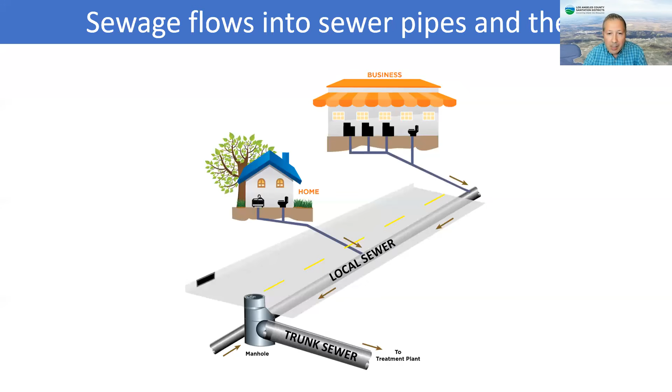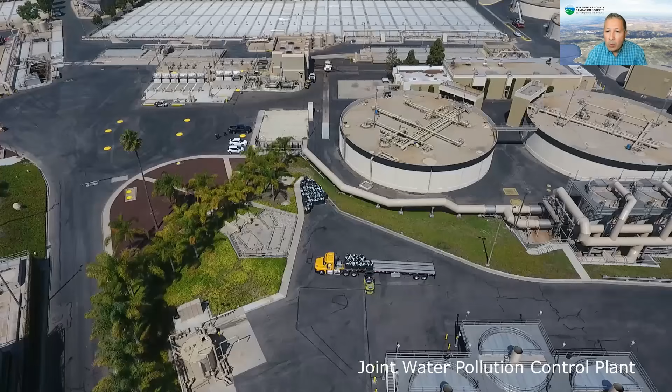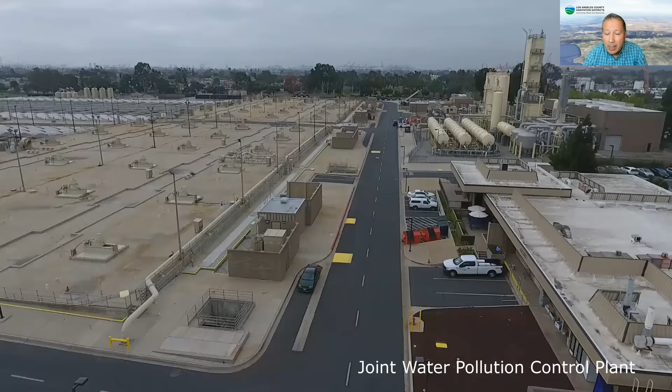Our largest wastewater treatment plant is located in Carson. It is called the Joint Water Pollution Control Plant. It is the largest wastewater treatment plant in our system. It is also the hub of the main sewer system that serves the southern half of the county. So 73 cities, 5 million people depend on this plant to operate 24/7 without failure.

And essentially, sewage flows into the plant, and in less than half a day, we turn that into clean water, and that clean water goes out to the ocean through 2 tunnels shown here in the orange lines that were built 60 and 80 years ago. And these tunnels were not built to current seismic standards. So in addition to their age, their seismic issue is also something of concern.

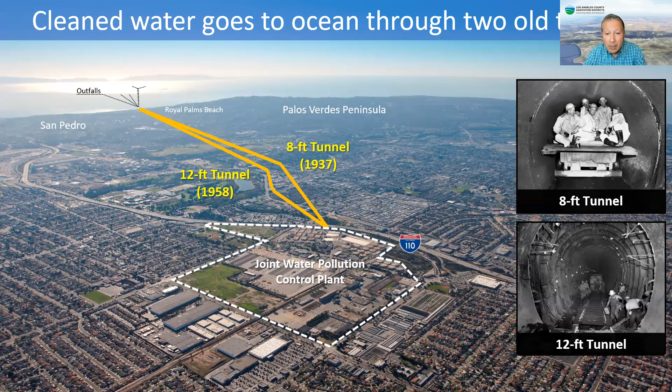So the Clearwater project is about addressing this aging infrastructure by building a brand new tunnel. And here to give us the latest on the tunnel construction is my colleague, Russ Vicaria.

Thank you, Glenn. So as Glenn mentioned, as part of this project, we're going to be building a new tunnel. So right now, the tunnel starting point is the wastewater treatment plant that you see in yellow above where it says JWPCP. And the 2 tunnels that are currently existing are shown in purple going down to Royal Palms Beach. And the new tunnel is shown with this green line.

It has quite a few more curves than the existing ones. And we're staying under public roadways per public request. And that's why it has so many curves. The construction cost is $630 million. And we'll talk more about it coming up.

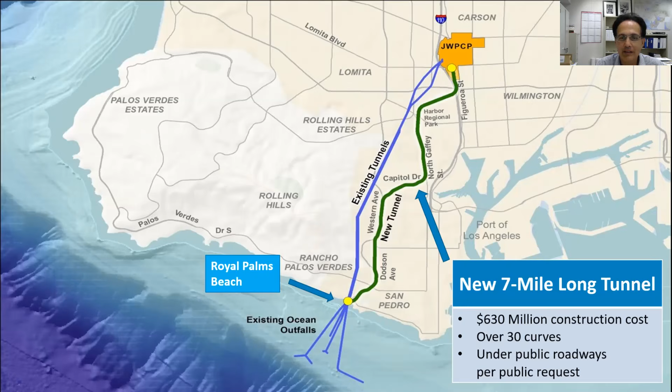So where we left off last time, if some of you attended our previous sessions, we had a tunnel launch ceremony some time back where we introduced the tunnel machine. And here you see the side of the tunnel machine sitting on top. The tunnel machine is named Rachel, after Rachel Carson, who's the author of Silent Spring. She was an environmental pioneer back in the 1960s.

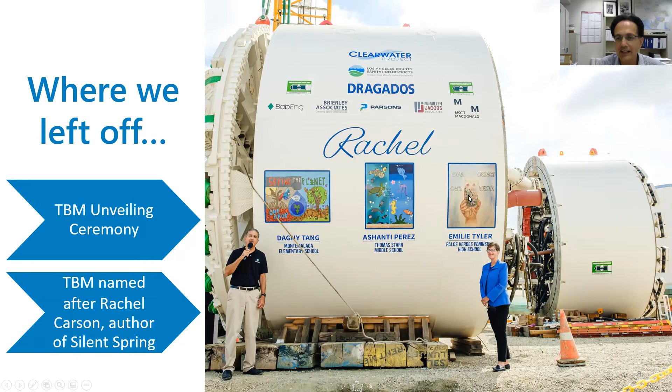And here's some of the artwork from local students that's put on the side of the machine, and the logos of some of the firms involved in the project. So this is how the tunnel site looked when the tunnel machine was sitting on top, last year. So here's the tunnel shaft where the machine was launched from.

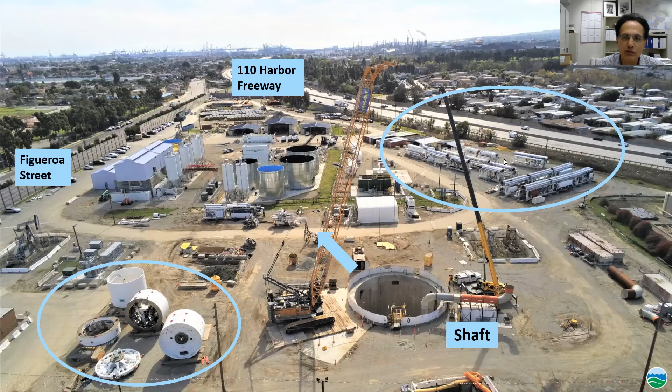On the left side, you see the front of the tunnel machine. And on the right side, you see all the trailing gear that's pulled along behind it, and the direction of tunneling is shown with this blue arrow. So lowering and assembling this tunnel machine was really a challenging task. And the reason is this.

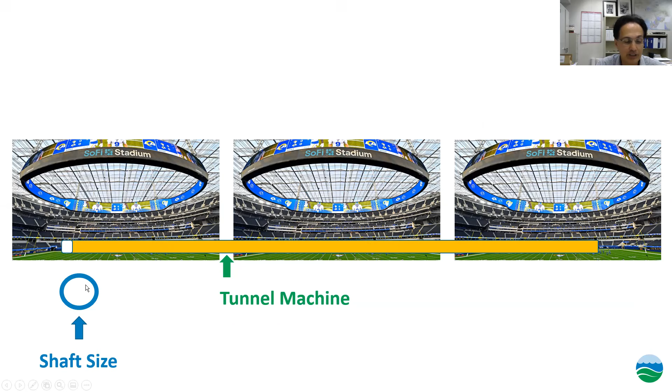So here we have SoFi Stadium, 3 of them laid side to side. The tunnel machine is 800 feet long. So it spans basically almost 3 of these football fields. So this long a machine had to be launched from a tunnel shaft this size. So it had to be put down in pieces, which made it really challenging.

So here is the first piece of the tunnel machine being lowered into the shaft. And you can see the crane lifting it. It's a very heavy piece. It's the guts of the tunnel machine. And you see it being swung over and then being lowered down into the shaft.

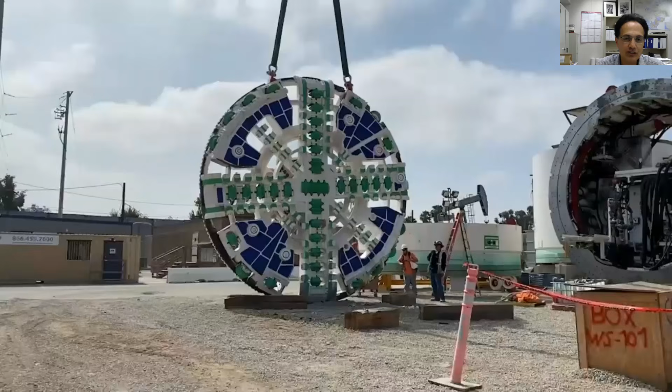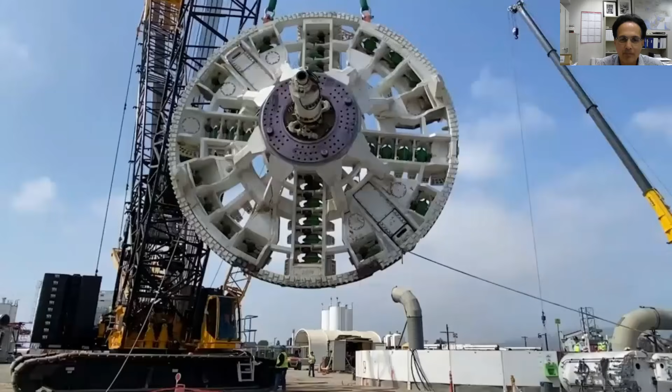And here it is sitting at the bottom of the shaft. And now the next piece is being lifted. And this is the piece that rotates and actually digs the ground as we move forward. So you see this piece also being swung over. And then it will similarly be lowered down into the shaft.

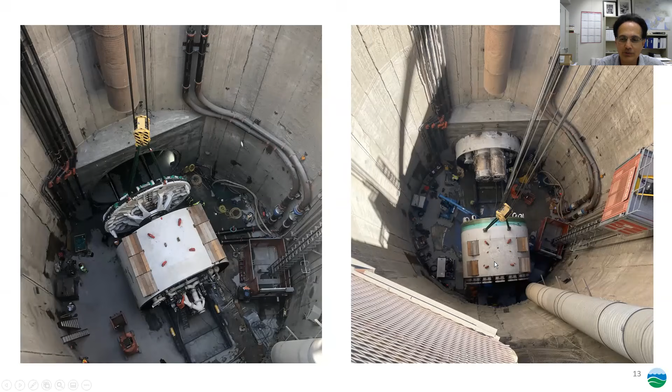So the picture on the left side shows the 2 pieces you just saw at the bottom of the shaft, and we're looking down it. And in front of the machine is a 30-foot long starter tunnel that was pre-excavated to help launch the machine. And on the right side, you see this picture where the front of the machine has been pushed into the starter tunnel, and then a subsequent piece is being lowered. And this is done progressively to launch the machine.

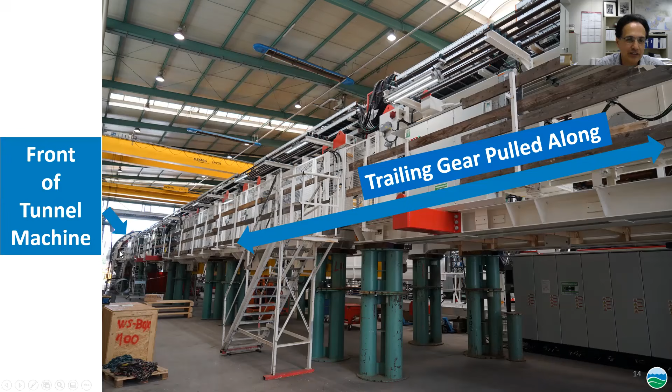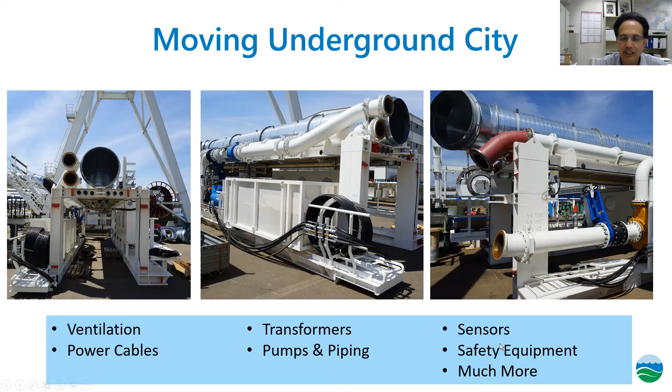So this is how the machine looked when it was assembled a couple of years ago in the factory in Germany where it was produced. So you see the front of the machine on the left side and all this trailing gear being pulled along behind it. So this trailing gear is like a moving underground city, and it's there to provide life support and other features to keep the tunneling going on. And it includes ventilation, power cables, transformers, pumps and piping, sensors, safety equipment, and much more. Everything needed to support this tunnel machine as it goes 7 miles.

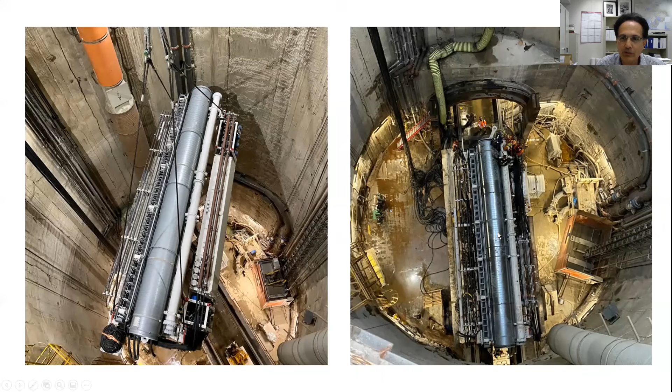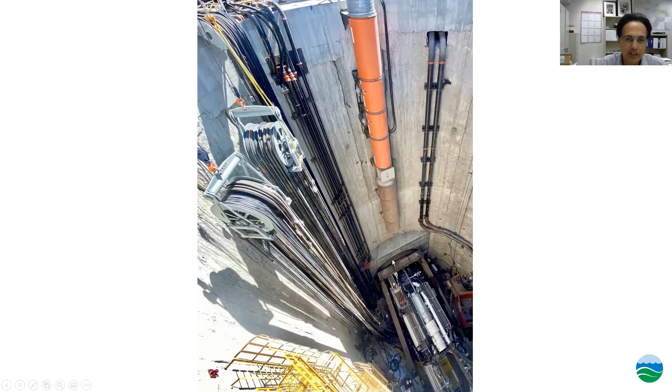And this video shows that piece of trailing gear being pushed into the tunnel. And as it's pushed into the tunnel, it's hooked up to the pieces that are already inside the tunnel digging forward. So the challenge is this: you've got to assemble this machine piece by piece, all 800 feet of it, while you're tunneling forward and you're feeding this machine from the surface. So all these cables, fluid lines, power lines are feeding the machine. And again, you have a 55-foot diameter shaft and you're launching an 800-foot long machine using that.

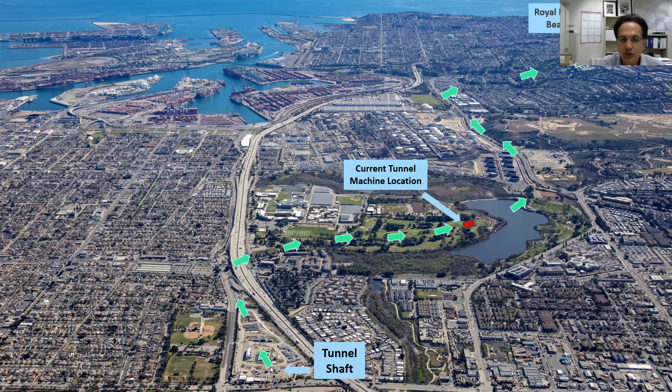So here's an overall view of the alignment looking south. The tunnel shaft where we started mining is at the bottom. The green arrows show the tunnel alignment. And the current location of the tunnel machine is shown in red. So we've already gone south, down across the Harbor Freeway and through Harbor Park Golf Course. So this is a drone view, and it shows the tunneling that's been completed to date.

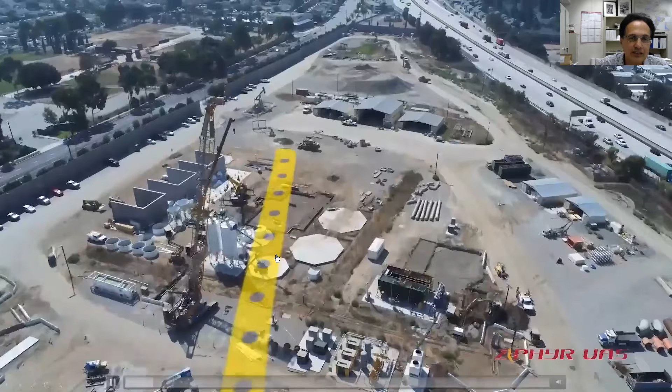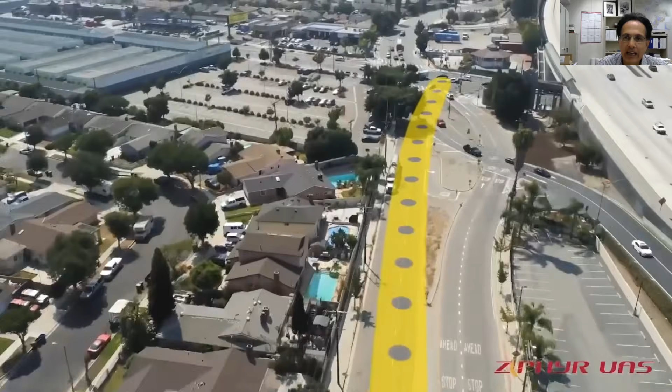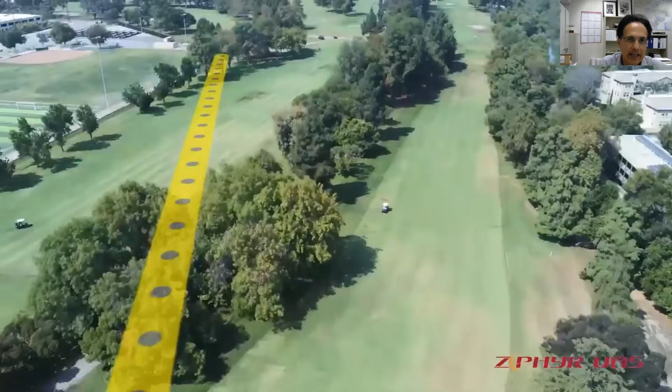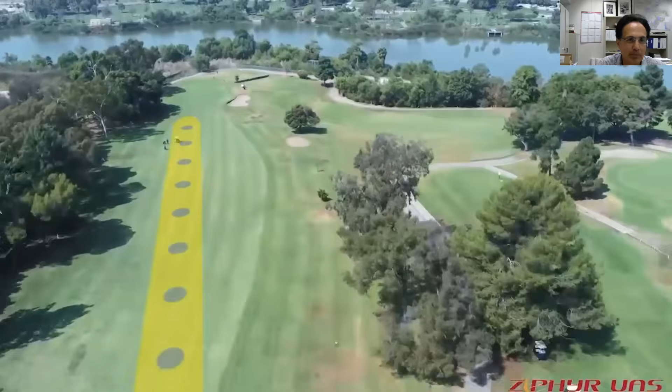So the tunnel machine came out, went diagonally across the shaft, went down south, and then past PCH, and made an 800-foot radius turn under the freeway, and then into Harbor Park Golf Course. And so we've been under Harbor Park Golf Course for the past several weeks. And again, there's a lot of golfers playing golf and they have no idea what's underneath them. And the tunnel machine currently is in approximately this location. And of course, we'll be continuing to mine forward.

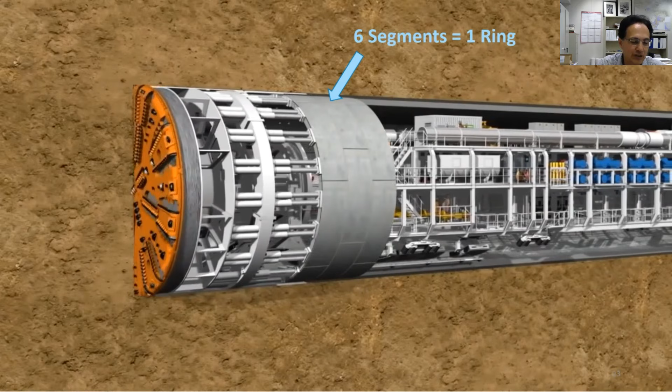So let's talk a little bit about the tunneling process itself. Now, those of you who attended past presentations, you may have seen this. So the way the tunnel machine works: the head of the tunnel machine rotates and the jacks push off the ring that was previously erected, which is made up of 6 concrete segments. Then the jacks retract and a new ring is built. And then the tunnel machine pushes off and moves forward. And that's done 5 feet at a time. And so that's how the tunneling process works.

So here's the same process, the erection of the segments within the tunnel machine, but actually how it's occurring in the tunnel machine. So you see the jacks retracting and a new segment being lifted up by the tunnel machine. And this is all going on inside the tunnel machine.

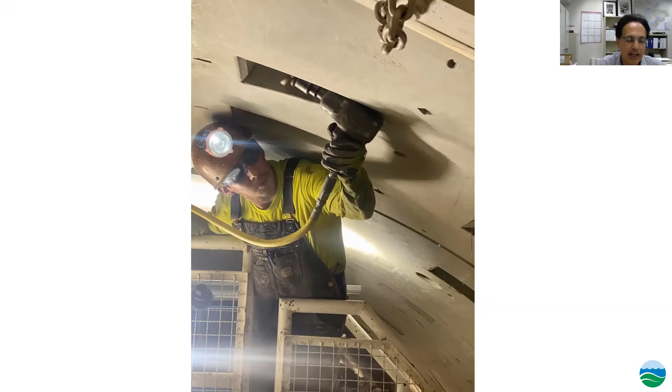So each one of these rings has 6 segments that are erected. And then once that's done, again, these jacks push off the last erected ring and move the tunnel machine forward. And once a ring is set in place, the tunnel liner is bolted in place, and then we move forward.

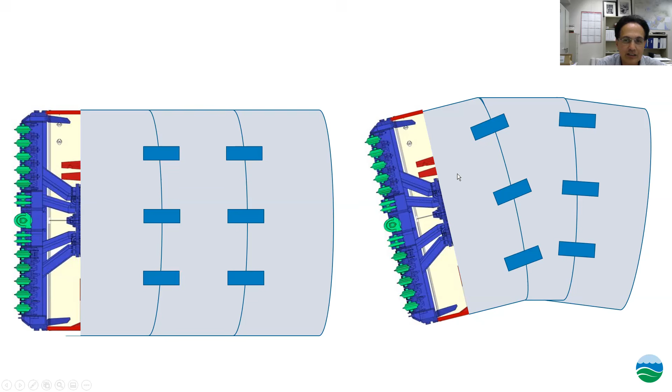And then in the blue rectangles are articulation cylinders. So the tunnel machine operator can use these articulation cylinders to turn the head of the machine and to make whatever diameter curve is required.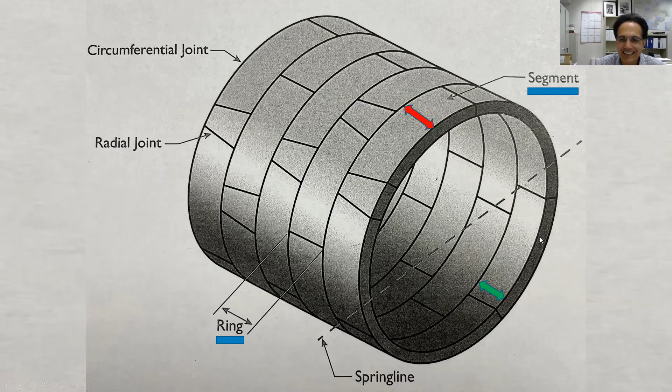And another question that's often asked is, we have all these different diameter curves, so we must be making specific segments to each curve. And actually we do not. We have one universal ring. So each one of these is a ring made up of 6 segments, but it's a tapered ring. So the distance shown in red is different than the distance shown in green.

So you can rotate that ring, and depending on the degree of rotation, you can navigate a curve. So again, we have no specific special rings made for this job. They're all universal, and we just rotate them to make the curves.

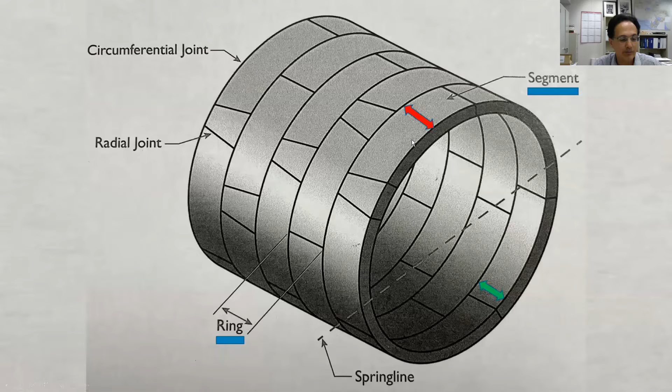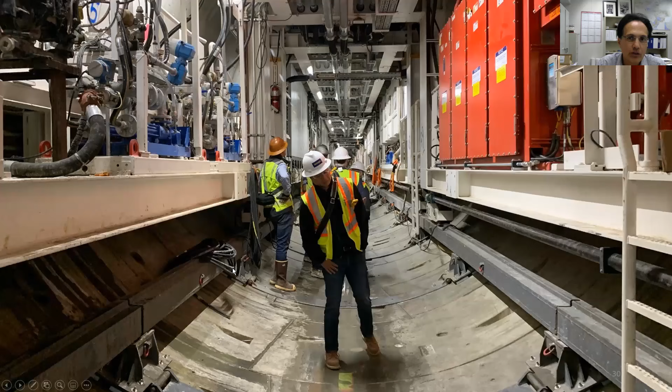So this is a picture taken inside the tunnel. And you can see this is a trailing gear. Again, it's designed so that the rubber-tired vehicles can run within the trailing gear. And you can see that it's riding on these rails as it moves forward.

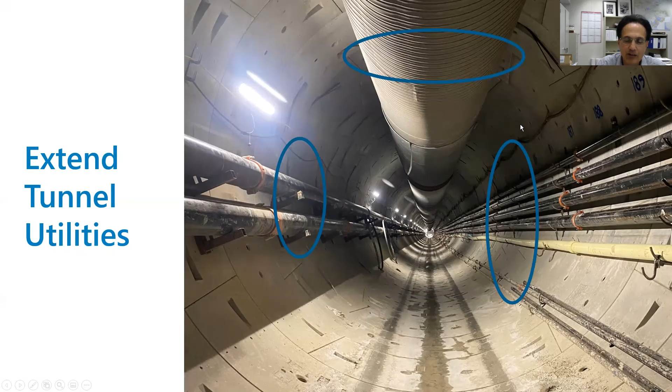And one of the challenges for the tunnel miners is, as the tunneling moves forward, they've got to extend all these utilities, including the ventilation at the top, the slurry lines to the left, fluid lines to the right, the power cables, in order to keep supplying the tunnel machine.

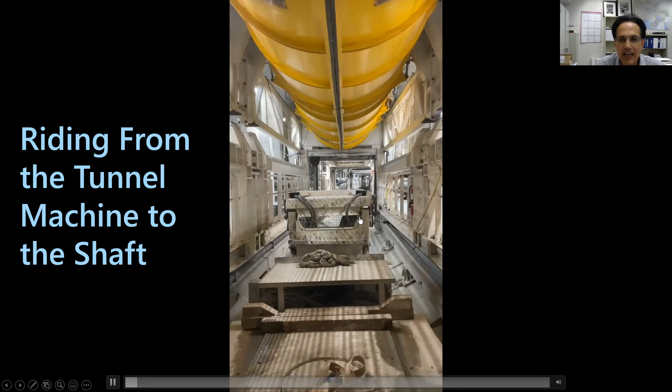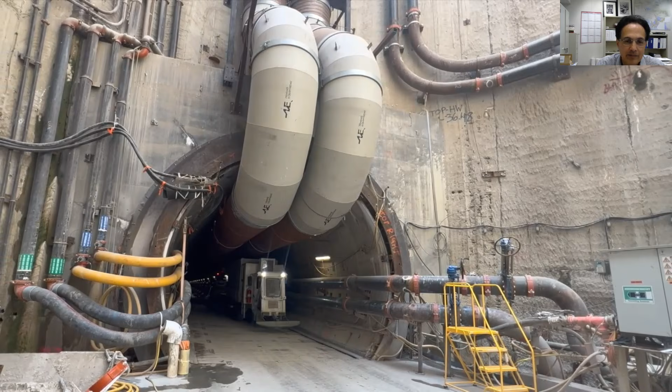So this video is taken while riding on one of the rubber-tired vehicles. Right now, it's within the trailing gear of the tunnel machine. And you'll see as it moves away, this is sped up, of course. And here it's navigating a curve, and it's heading back towards the shaft. And this is the same vehicle appearing at the shaft to offload material or to load material to take it back to the tunnel machine.

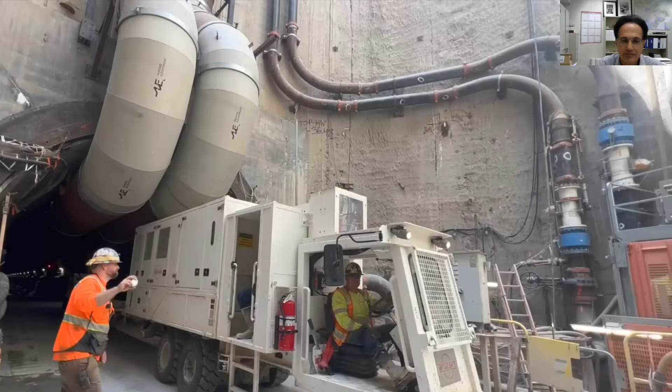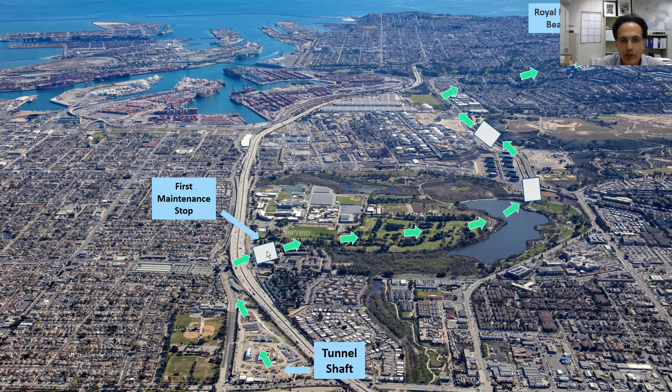So one of the things that needs to happen is the cutting tools for this tunnel machine have to be inspected and sometimes replaced as it's navigating along its way. So as I mentioned, the green arrows show the alignment of the tunnel machine. And we have 3 planned maintenance stops that are shown with the gray rectangles. We already completed the first maintenance stop, and then we'll be completing another one coming up.

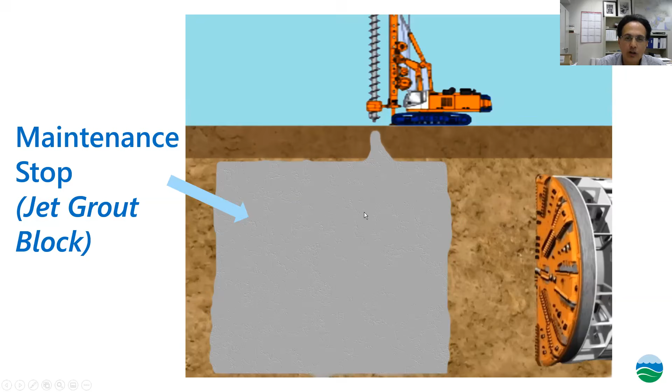So the maintenance stop, all it is, we pump grout into the ground to create a watertight block, because again, we're under the water table. So we created these blocks, and then the tunnel machine drives into the block. It can depressurize. You don't have to worry about water intrusion or soil intrusion. And then the tunnel miners can inspect and replace cutting tools as needed.

They can also do this outside the maintenance stops, but it's a much more involved procedure, which involves like a deep sea diving type operation with working in compressed air.

So the tunnel miners who build the job work 24 hours a day, usually 5 days a week. It's 3 8-hour shifts. And they also sometimes mine on Saturday. There's certain locations where they've also mined 7 days a week. So before each shift, the tunnel miners get together, there's a safety meeting, and then they go down into the shaft and to the tunnel machine.

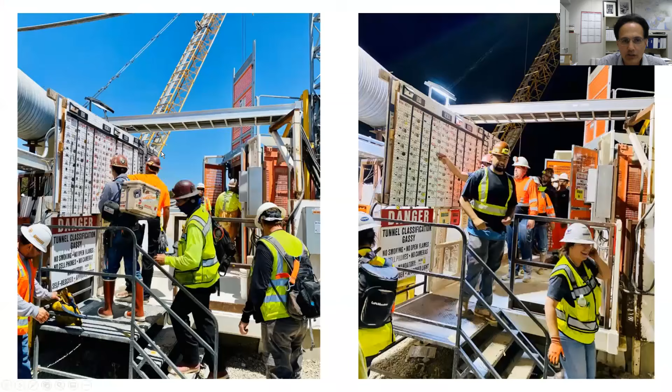So on the left side, you see the tunnel miners, they have this brass board where they basically have each one of their names, and they mark that they're inside the tunnel. So if there's any kind of safety issue, anything that happens, you know who's in the tunnel and who needs to be evacuated if needed. And then this is the swing shift. So they go in during the day on the left side, and then they come out when it's already dark, and then they're brassing out.

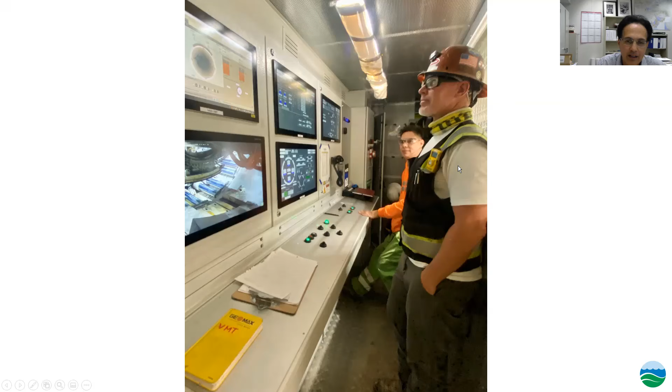This is one of the TBM operators, and this is inside the tunnel machine. So this is a very mechanized, automated tunnel machine, which you also need the tunnel miners there to assist in the operation. So this is one of the district's inspectors. Here's that brass board I was talking about, and he's going to explain a little bit about the safety equipment that everybody has to wear to go down in the tunnel and the procedure to go down.

Hello, we're here at the LA Outfall Tunnel Project, getting ready to go down into the shaft to do some inspection. Prior to going down, we need to make sure that we check ourselves in on the brass board. We take our tag, we take it from the out, we put it on the inside. And you also make sure that we have our proper PPE, which consists of our safety vest, our hard hat, our H2S monitor, our self-rescuer, and also rubber boots are needed. And then we are able to go.

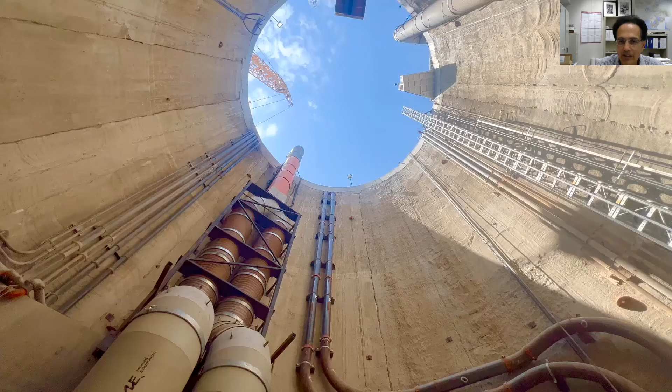So John, our inspector, is getting into the elevator that will take him down into the shaft, just like the miners do. And this is a video taken from the bottom of the shaft looking up. So anybody coming down comes down in this elevator, and then you'll see a little shot from down below.

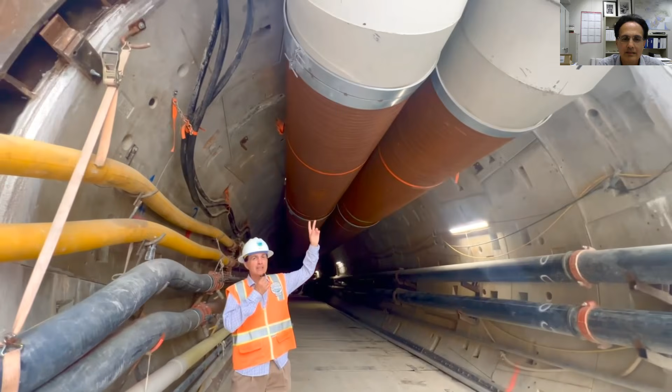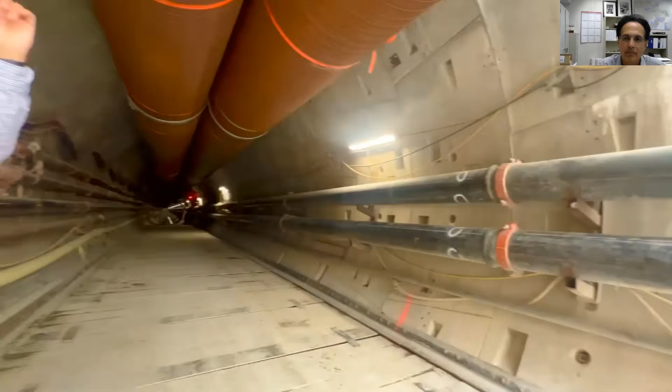We're here in the tunnel. You can see the ventilation lines up above me that feed the miners that are there, slurry lines and other fluid lines that feed the tunnel machine and keep the tunneling operation going on. And you see the tunnel segments here that are erected by the tunnel machine as it's moving along.

So the other thing that's very important on this job is monitoring the tunnel machine, because this is a very complex machine and it throws off several hundred data points every few seconds. And so you have the tunnel machine on the left side. It's connected by a fiber optic line to a computer server in the district's trailer on site. And then that information is backed up to the cloud. And we get this information in real time to our computers and our cell phones, so we can see exactly what's going on. And the contractor sees this, and the district staff and inspectors also see it.

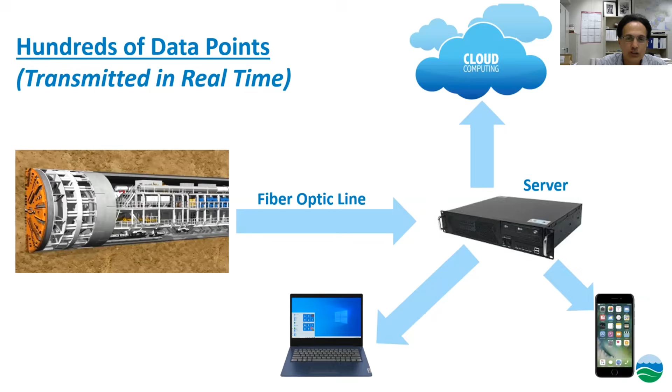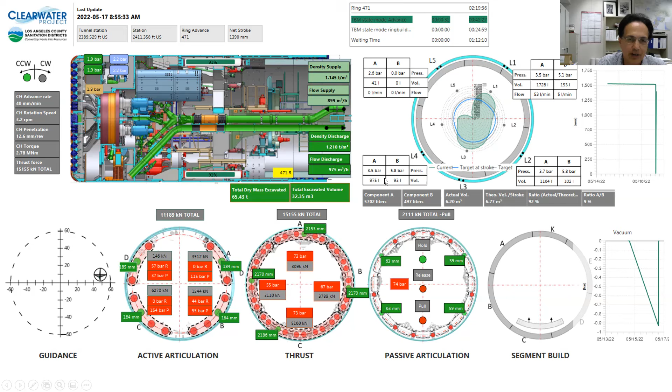So this is one of the screens that's in this software, this TPC software that manages the data from the tunnel machine. You can see various things. On the left side, you can see if the cutter head is turning clockwise or counterclockwise, how fast the machine is advancing, how quickly the cutter head is turning, how much thrust force or torque is being applied. And up here on the top side, you can see, is the tunnel machine currently digging? Is it erecting a ring, or is there waiting time? And there's lots of other data in here that everybody monitors to make sure the process is working as intended.

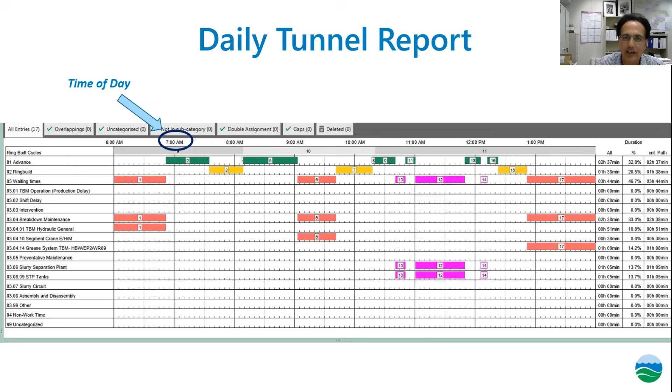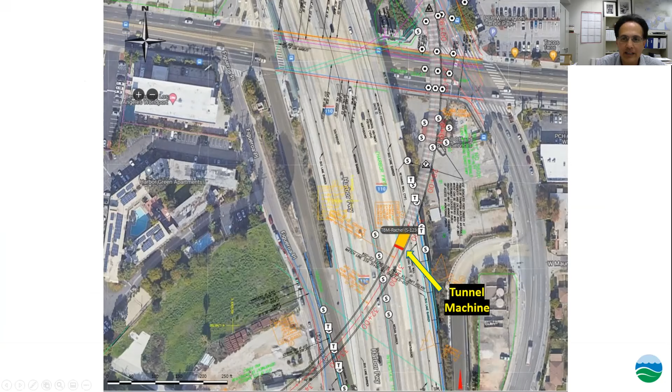This is another view from the software. This is like a GIS view. So you see Pacific Coast Highway here, and then the Harbor Freeway, and this was taken some time back. So you can see the exact location of the tunnel machine here in yellow and red. And all these white circles are ground monitoring instrumentation that you can click on and see the status of each one in real time as you're going along. You can do this on your cell phone, on the computer, or tablet.

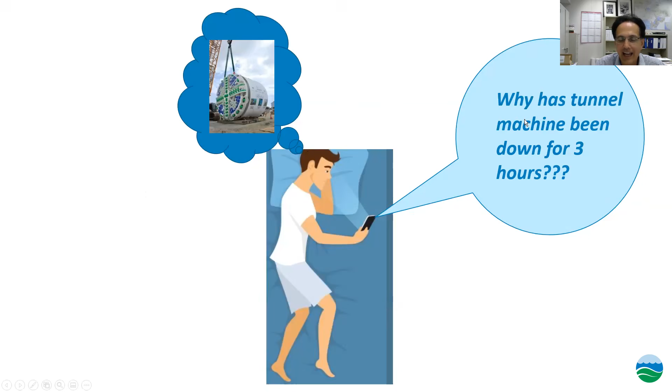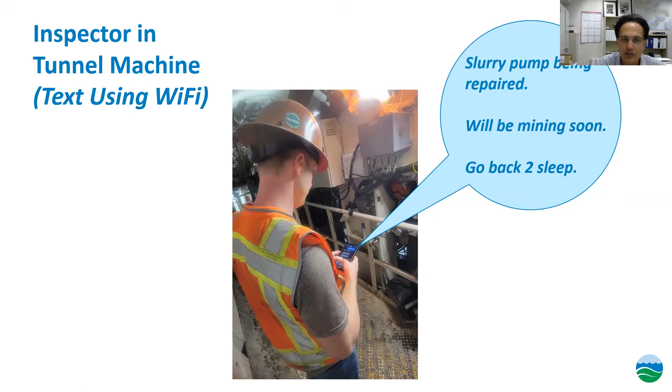So one of the things that's important is communication. And the tunnel machine may be a mile, 2 miles, 5 miles down the line, but there is Wi-Fi in the tunnel. So you can communicate with the inspectors, and the contractor can communicate with their people at the front of the tunnel machine. So it could be the middle of the night. Sometimes you're mining, you may be thinking about what's going on. Sometimes there's critical operations, like when you're going under the freeway, and you can text the inspector and ask a question. And then the inspector in the tunnel machine, they've got Wi-Fi on their phone. They can send a picture, video, or communicate back. And again, the contractor can do this, and district personnel can also do this.

The other thing this software does is it analyzes the tunneling process. So this pie chart shows what percentage of the time the tunnel machine is advancing, meaning digging, what percentage of the time it's building a ring, and then waiting times.

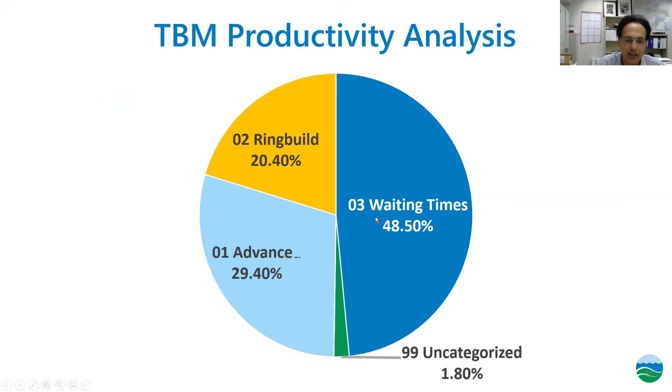And this information can be sliced and diced. You can print this for a day, for a week, for a month. You can see how the trends are going. So the contractor uses this, the district also uses it to monitor the tunneling process. It also will give you various histograms and charts showing average daily production and a whole host of other data points.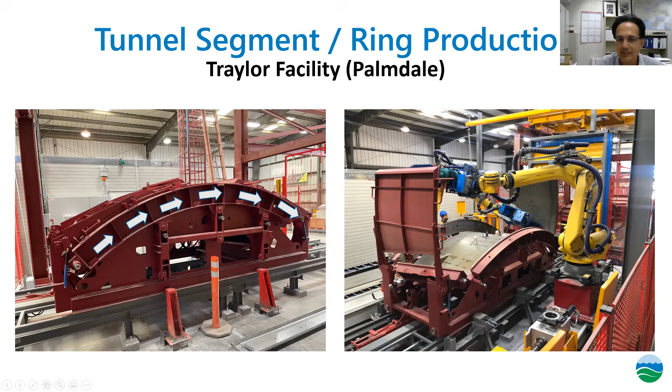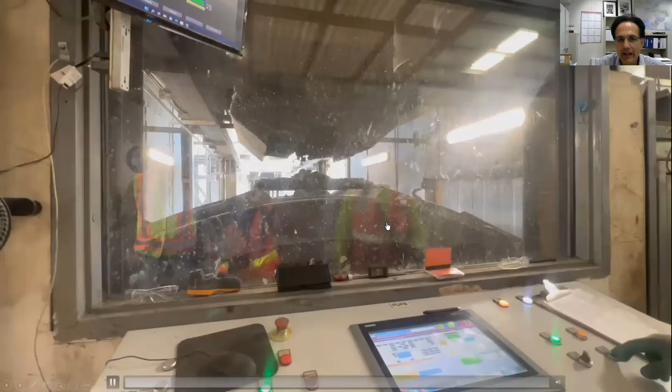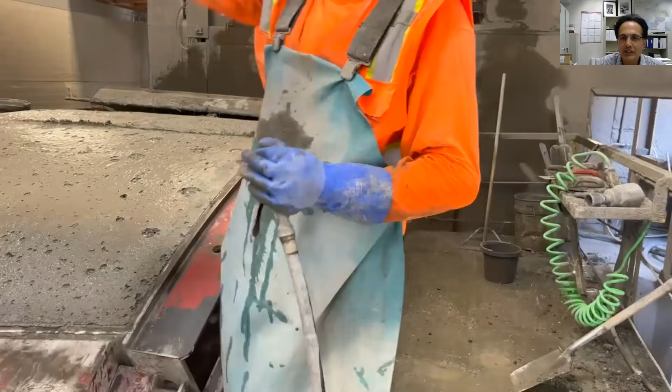So this video shows what the workers up at that plant do. So here's a mold, and they're getting it ready. They're putting the gasket in place, and they're getting ready. Here, the concrete is deposited into the mold. And then they make sure that everything is smooth. The concrete segment is finished properly once it's cast.

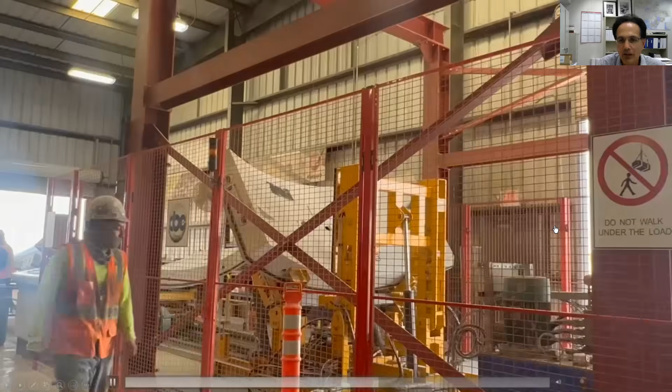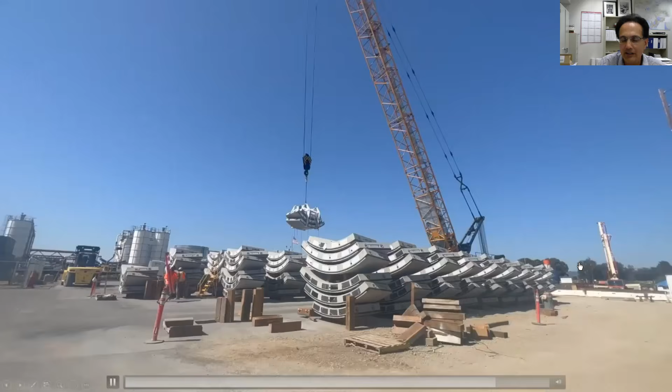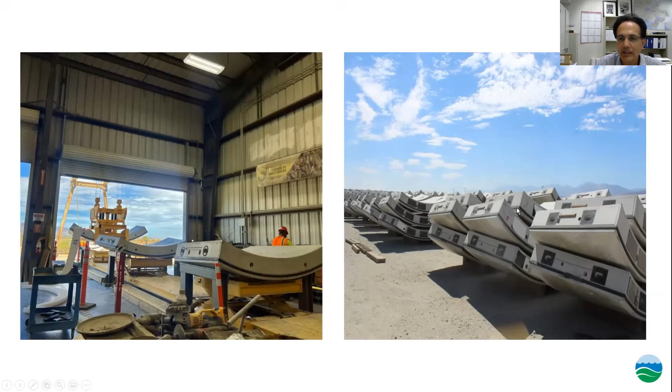And of course, they got to clean the mold, and then the completed segment is lifted off via conveyor and stored outside and then trucked to the site. And here you see some of the gaskets on the segment, because these segments have to be watertight because they're well under groundwater. And again, these are a couple of pictures from this facility in Palmdale where all these segments are stacked up, ready to go.

The other thing that's important to do is monitor the ground to make sure the tunnel machine is operating properly and make any kind of adjustments that are needed. So this ground monitoring is also done remotely and wirelessly. So in these pictures, on the bottom left-hand corner, you see an underground point that monitors ground movement underground. You see a structure point that monitors any kind of structure nearby, or a ground monitoring point on the right side.

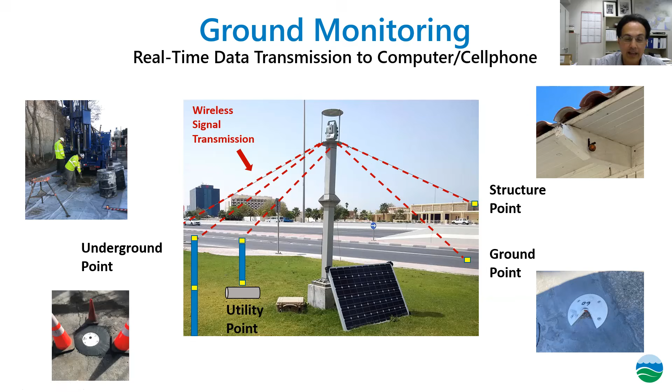So all these points give off wireless data, and these are read wirelessly by these total stations that then transmit the data to us, and we can view it on cell phones or computers, and the contractor can also, to make sure that everything is going properly. So this is one of our inspectors who's going to explain some of the ground monitoring that we did at Harbor Park Golf Course.

Hi, I'm Greg Degner, one of the inspectors here on our tunneling Clearwater project that we have going on. Right now, we're currently at the LA Harbor Golf Course, and I'm here to explain a little bit about the instrumentation that we have installed here at the golf course to make sure that we're not disturbing any of the ground that we're tunneling under here today. So to my right here is our total station.

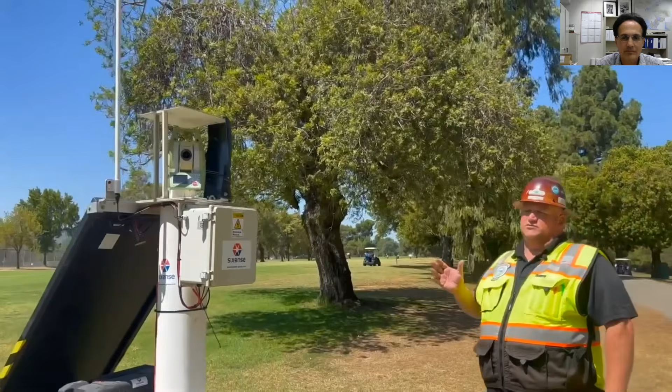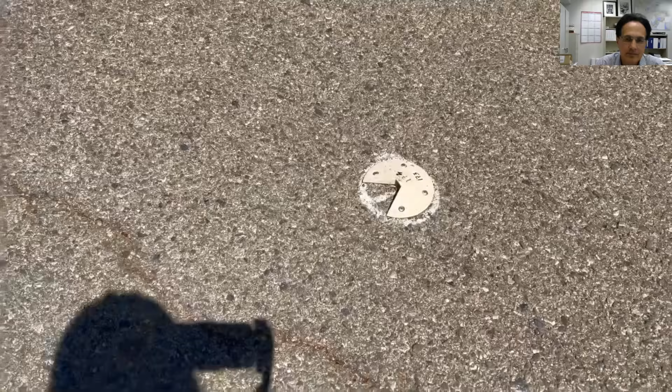The total station is basically the device that is recording the ground level and the different elevations that we have throughout the golf course. What it's doing is it's shooting a laser to different prisms that we have set up. There's one here on the asphalt. It is low profile, so the golf carts and golfers can avoid hitting it, so we can keep our data nice. The prism in the front there reflects back to the total station and records that elevation that we're at. And then we can monitor throughout the day. It can take readings every minute, and it'll let us know if that ground is moving.

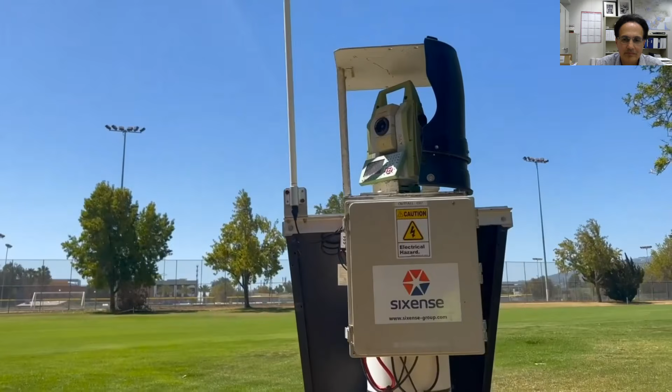Part of the components here, we have a solar panel and also backup batteries that will keep this machine running. So the solar panel is the black part in the back. The red case down here, backup batteries. And then, like I said, at the top is your total station. And this piece right here has been added for protection from golf balls that might be hit.

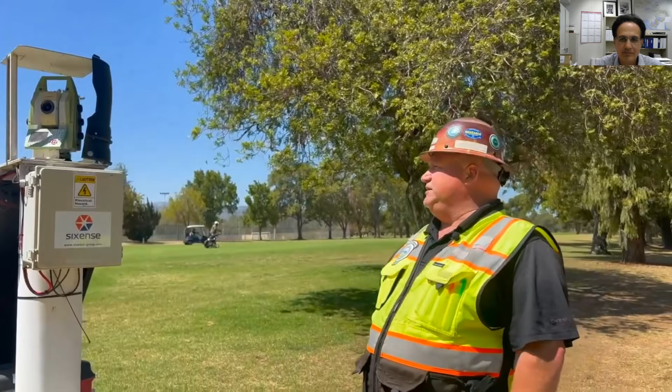Right now we are currently between two fairways. So one of the things that we do have to be careful is, one, that we're not interfering with the golfers as they're here today, and two, to make sure that our equipment is still sound. So all this information is transmitted and we can view it on screens like this. So here you see a road and all the white circles are various instrumentation that you can click on and you can see the data in real time.

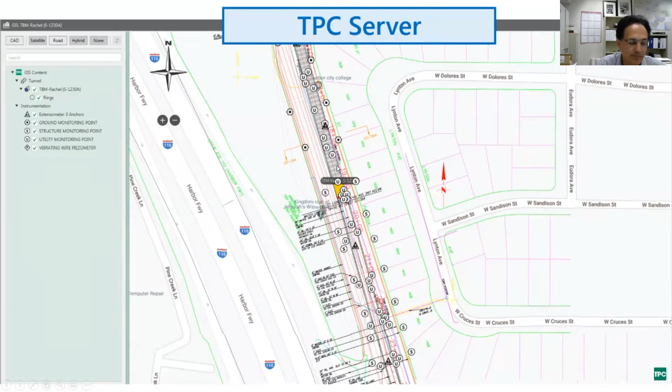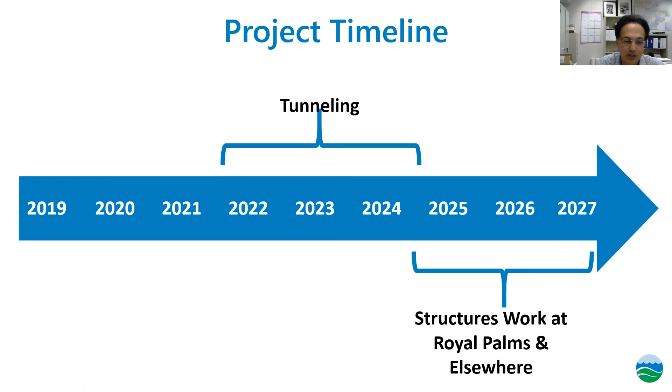So the project timeline, we started mining a few months ago. The tunnel mining is scheduled to go until late 2024 and it'll end at Royal Palms Beach. And then at that point, we have another 2.5 years of work to do down near the beach, which is the subject of another presentation. So that's the overall time frame for the job. And we can take any questions you may have.